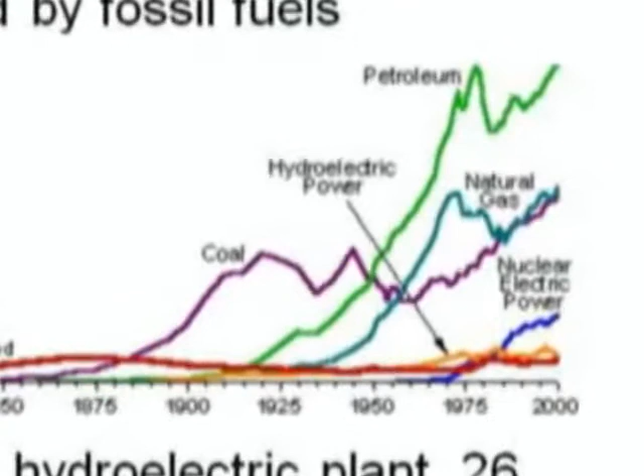This is U.S. energy use from the Energy Information Administration from 1650 forward. And the main point of this is, if you look early on, it's renewables, it's wood, followed by water. And then people began to burn coal, which, living in New England, turned out to be a great environmental boon because it let the forests grow back that had all been cut down for fuel.

So the history of renewable electric generation starts about when the history of electric generation starts, right? Thomas Edison's Pearl Street station in September of 1882 in New York, a coal-fired generating station. 26 days later, the first hydro plant was opened in Wisconsin. So we've done a lot of renewable generation in this country, mostly hydro.

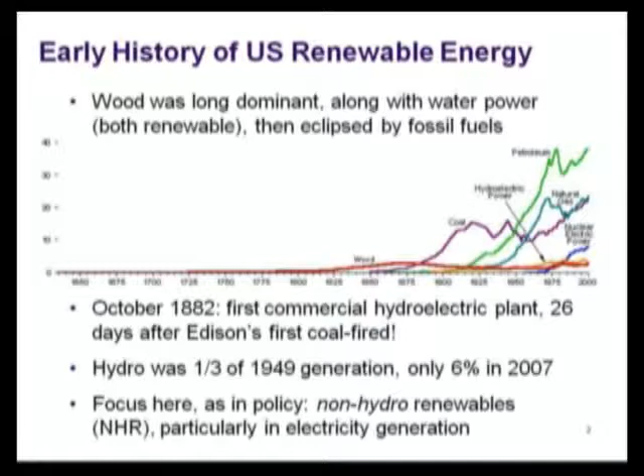In 1949, after a lot of dam building in the 30s, about a third of electric generation in this country was renewables, was hydro. That has declined. Hydro generation has actually increased since 1949, but not nearly as much as electricity consumption has.

And the focus in all policy talks, and the focus in this talk, is on non-hydro renewables. So when I talk about harnessing renewables, I'm really mostly talking about non-hydro renewables and for electricity generation. But I will talk about non-hydro renewables more broadly. This is the share of non-hydro renewables, NHRs, in total U.S. energy from '78 forward. There are a few interesting things to point out.

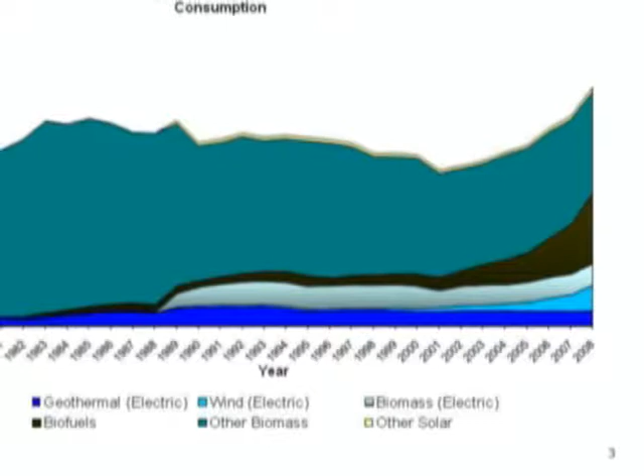From the bottom up, geothermal, pretty steady. Then wind. Notice the sharp ramp up in wind. Then biomass. We tend, when we talk about renewables, to think about wind and solar, but as we will see as the talk goes on, biomass, heavily wood and wood waste, turns out to be very important in the U.S. and elsewhere. And then biofuels, the wonderful ethanol program you begin to see ramp up.

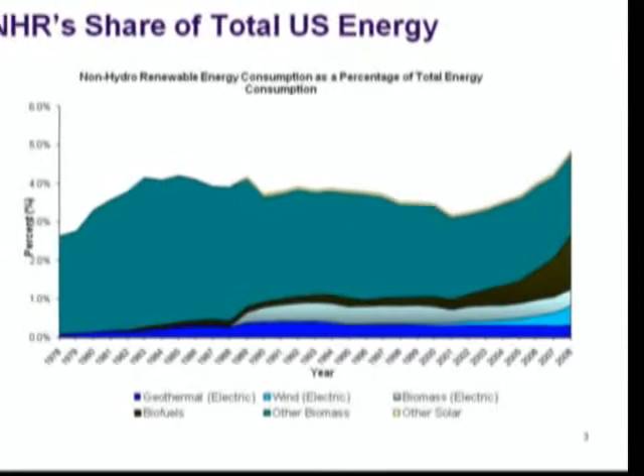I will have nothing kind and indeed nothing to say about ethanol. And then other biomass, which is typically wood for heat. And then this curious yellow at the top, which is other solar. This is not solar for electricity. Some of it is solar for hot water. Most of it is those covers that go over swimming pools to heat them. That counts as solar heat.

We lead the world in solar heat for swimming pools, probably because we lead the world in swimming pools per capita. But Australia's right in there with us. Other uses of solar do not appear in this chart. They're too small. If you focus just on electricity, you see the main sources, the main renewable sources. Again, biomass is not unimportant.

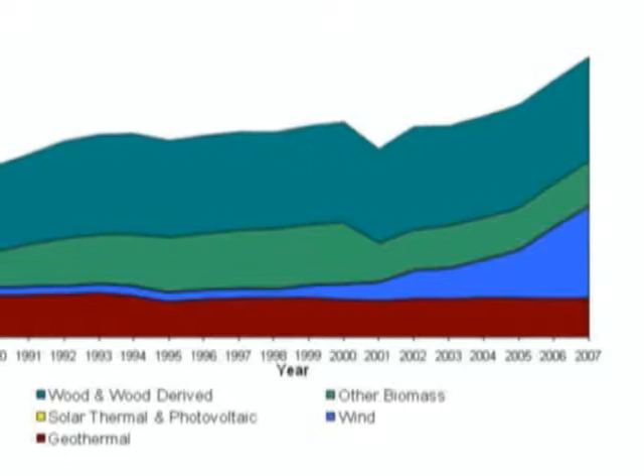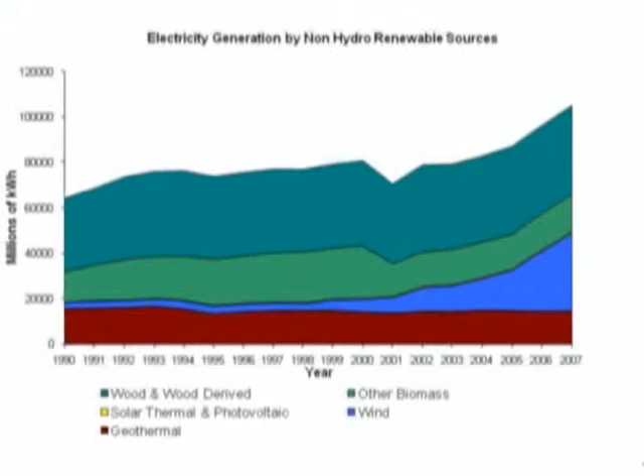I wish I knew exactly what happened in 2001. Somebody may know. I do know the dip in geothermal in the early 90s, which I will come back to. But the two points to be made here. First, look at the ramp up in wind, and this just goes to 2007. And second, look at the importance of wood and wood-derived and other biomass. The importance of biomass in electricity generation, non-hydro renewables, has dwarfed wind until quite recently and is still more important than wind. So that's generation.

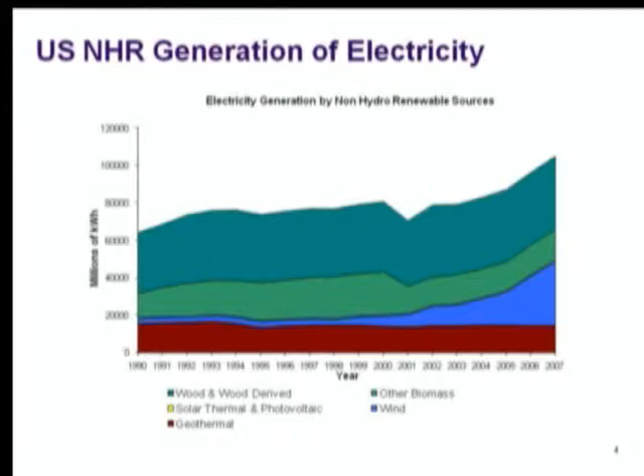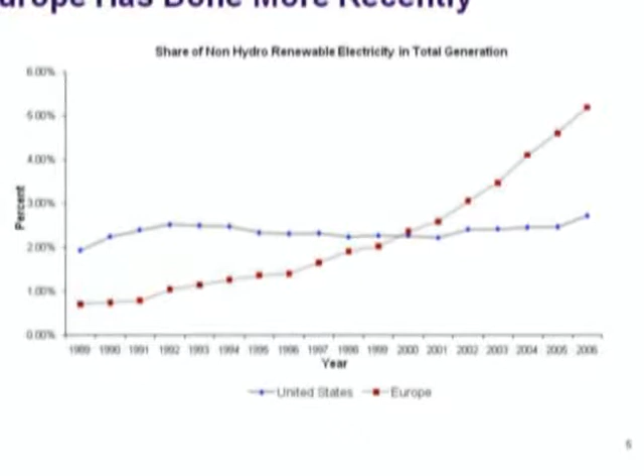On the last data I saw, Michigan is running a little over 2% non-hydro renewables in electricity generation. But the U.S. share, you know, I don't honestly know offhand whether this is the peak or 2006 is the peak, but basically it's flat. Whereas Europe did very, very little and ramped up dramatically in recent years.

The U.S. has a good deal of potential. This is the International Energy Agency. It talks about U.S. potential for non-hydro renewables. They actually did hydro, but I just took it out of the table. Notice the enormous potential for biomass. Wood waste, some of it municipal solid waste. All of these are important sources in various places.

Enormous potential for biomass, also enormous potential for wind. According to the International Energy Agency, the wind potential of the U.S. is greater than almost anywhere else. If you took all of Europe onshore and offshore, it gets to be comparable. Notice also how much smaller the estimated potential is for solar, despite all of the talk about solar. And what a small fraction of the solar potential we've realized, less than 1%. So it's a relatively small potential, relatively small amount realized.

In terms of realizing potential, we do better in biomass and we do better in wind. And geothermal looks to be about tapped out. According to the IEA, we have exploited about half the country's potential for geothermal, but are just getting going in wind and biomass.

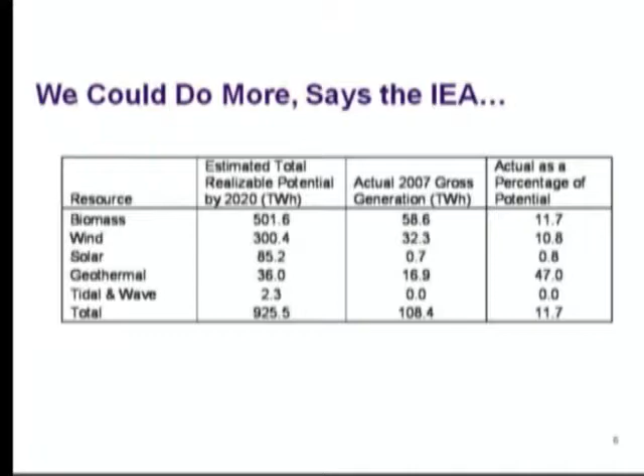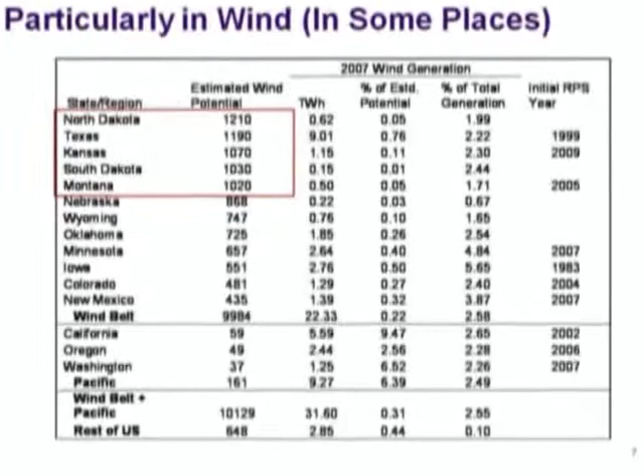This is potential for wind. This is a different source, so the numbers don't quite add. The point of this chart is that there's a lot of wind potential, but the wind potential is heavily localized. Michigan does not make this list. I'm told if you use another source, Michigan would make this list, but this is onshore in particular. Onshore wind potential, an awful lot of it is in North Dakota, Texas, South Dakota, Kansas, and Montana.

Those are notable because, aside from Texas and Kansas City and St. Louis, there are not a lot of people in those places where there is a lot of wind, which gives rise to debates currently in Washington about if we're going to use that wind, how are we going to get it to where the people are, and who's going to pay for getting it to where the people are.

It's interesting that if you look up here, generation as a percentage of estimated potential, these numbers are pretty tiny. If you look down here, the 3 Pacific states, California, Oregon, and Washington, which don't have enormous potential, again, this is the American Wind Energy Association's estimates of potential. Their potential is relatively low, certainly low relative to these, right? This would be potential in terawatt hours a year. I didn't put the units up. But they've done a much better job of utilizing that potential.

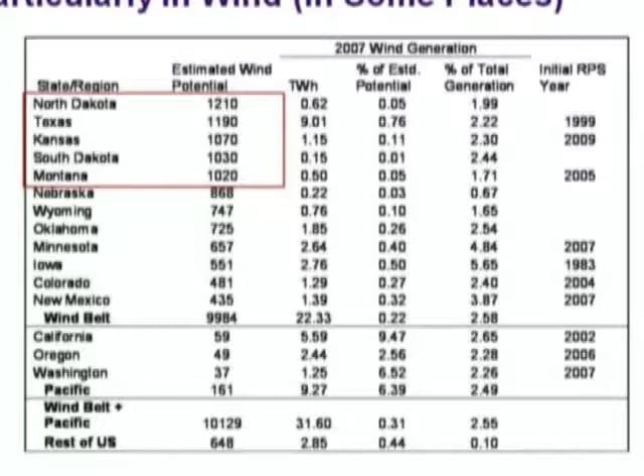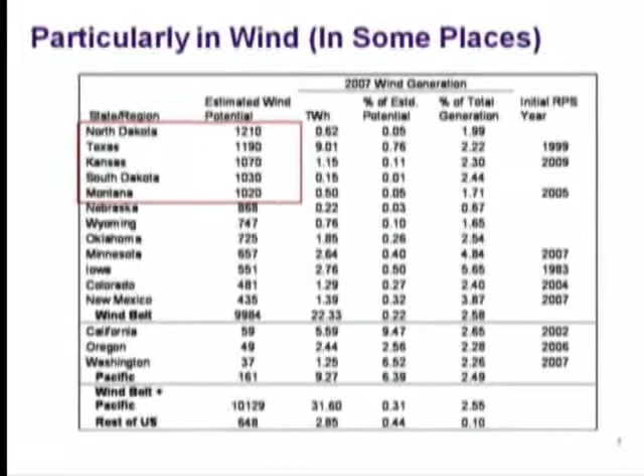California has used almost 10% of its potential, and gets about 2.5% in 2007 of its electricity generated, not necessarily consumed, from wind. So we have a lot of wind potential. It's concentrated. Some states have done a great deal more than the U.S. average of about 2.5%.

Maine. You may not be familiar with Maine. Maine is a few people on the coast and a few ski resorts and some lovely lakes and a whole lot of trees and a whole lot of commercial logging operations, particularly in northern Maine. And it is not too surprising that Maine generates a lot of electricity from wood and wood waste. A lot of it's wood waste, sawmill generation using wood waste for milling operations. But Maine gets well over a quarter of its electricity from non-hydro renewables.

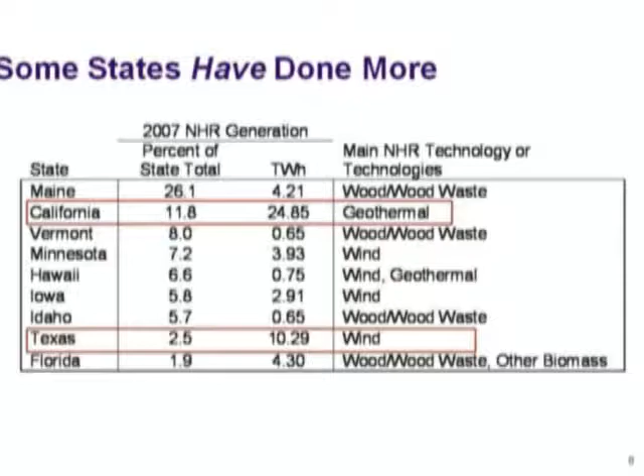California, which stands out in terms of just sheer volume, as well as the percentage, gets a lot of its from geothermal. You can look down this list. Vermont has a lot of trees too. And Hawaii, everything else is expensive. But the other place that stands out, interestingly enough, is a place that most of us don't think of as particularly green or environmentally conscious, particularly if you read the news on the latest Republican gubernatorial primary. Do not think of it as a green state, but it gets a pretty high percentage and a lot of power from wind. I'm going to say a little bit about California and Texas and how they got where they are.

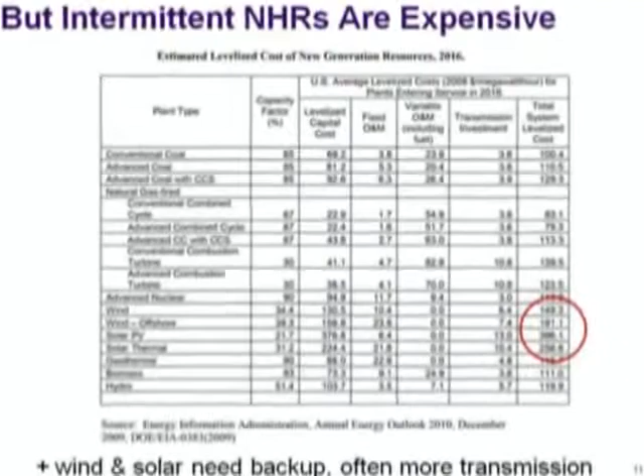So I'm an economist, and when I'm thinking about policy, it's usually not a question of what we can do, but what we should do. And what we should do usually depends to an important extent, not exclusively, but at least to some extent, on the cost. So if you look at those cost numbers on the right side, you will see that they vary a lot. This gas number undoubtedly assumes that you run the gas plant all the time, which you don't. But just take conventional coal plants as a benchmark. That's 100. You get a lot of electricity from coal in this part of the country.

Now look at the numbers for wind, and look at the numbers for solar. So solar looks like 4 times as expensive. Photovoltaics is 4 times as expensive. Solar thermal, which really only makes sense in the desert Southwest, is 2.5 times as expensive. And even wind, that's offshore ocean, not offshore Great Lakes, but even wind is between 1.5 and 2 times as expensive. So if you build a lot of it and you pay for it through electricity rates or subsidies, it's a cost.

And the other thing about the ones I've circled, and you see it a little bit for solar, you don't see it for wind: you see the transmission investment column showing a lot more transmission for solar than for some of these other technologies, but not so much for wind. That assumes wind is located near the electric load. If you build windmills in North Dakota and you put new transmission lines to get it to Detroit or Chicago or Cleveland, those costs go up.

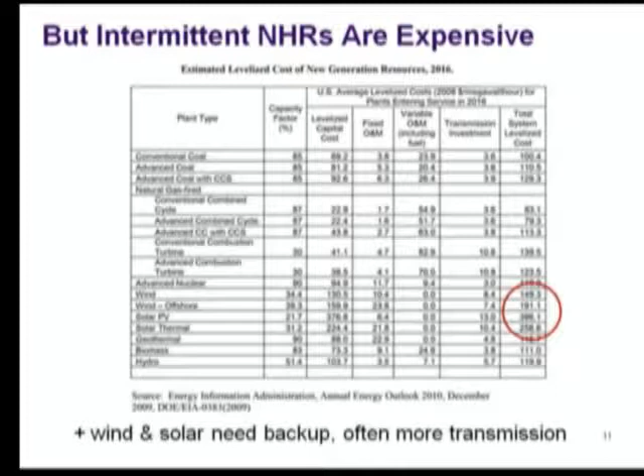And the other thing, which is important to recognize, is they need backup. How does Denmark do 18% of its electricity generation from wind when wind sometimes blows and sometimes doesn't blow? Denmark has good connections to Norway under the ocean, and Norway has surplus hydroelectric capacity. So when the wind doesn't blow in Denmark, hydropower goes to Denmark as backup. And when the wind is blowing in Denmark, they can sell wind power back to Norway. So Norway provides backup.

How does it work in Spain? Well, in Spain, with all that wind, they don't have hydro. Spain is dry, you may recall. Spain has coal, but coal, first of all, is very dirty. Spanish coal is very dirty, and they're trying to phase it out. And second, you don't ramp coal plants up and down. So what do you do? You build more gas plants.

But of course, the wind blows most of the time. It's just sometimes it doesn't blow in the locations where they put windmills. So those gas plants don't get to run very often. So you build gas plants and you run them only occasionally. This is not a cheap proposition.

Now, how much do you need? Do you need one megawatt of gas capacity for every megawatt of wind? No, because their wind is spread around and it never all stops, so things aren't terrible. But it is an extra cost. It's not a cost you have for municipal solid waste. It's not a cost you have for biomass. It is a cost for wind, and it is also a cost for solar. Solar is a little tricky.

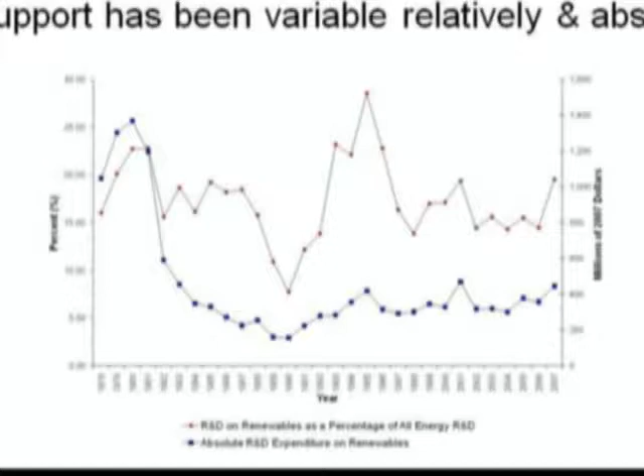Can you see this? The blue is dollars. There was a lot of excitement around 1980 when we had the oil shock and we were going to spend money on renewables and it was going to be great, and then the oil prices fell. Here's support for renewables, and here's support for renewables as a percentage of energy research. So in both absolute and relative terms, we have not done a great job at the federal level of support for renewables.

What about deployment? Well, again, the economist says, okay, deployment is a good thing. Let's talk about why. Why do we want more renewables deployed? In Europe, they talk a lot about energy security, and you even hear it here. But energy security in this country is an oil problem. In Europe, it's also a gas problem because they get Russian gas. And we don't generate electricity with oil. So if you're substituting American wind for American coal, you're not doing much for energy security.

What about jobs? Well, this is very popular, and I'm sorry, but this argument simply doesn't fly. There's the question of what those people would be doing otherwise, and if you say they'd be unemployed otherwise, then you have to ask, why not fix bridges? Why not repair roads? Why not build schools? There are lots of other things you can do to create jobs. Why is this a particularly good job creation thing? In Massachusetts, the governor desperately wants to build windmills offshore. Windmills offshore are really expensive, in deep water in particular.

But he says it'll be Massachusetts jobs. And you say, wait a minute, where are the windmills going to be made? You bend metal in Michigan. We do not bend metal in Massachusetts. We talk about bending metal. We do the theory of bending metal. We do not bend metal. So they will not be made in Massachusetts.

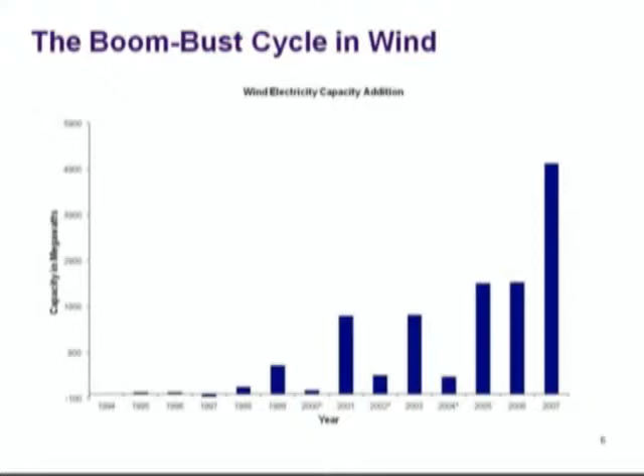And you can relate the good years and the bad years to, was the subsidy solidly in place or not? Were people waiting to see if Congress would pass it? Was it in fact off? I'm not going to walk through it. I don't know it off the top of my head, but it's not like the industry is being dumb here or people are placing bad orders.

It makes a whole lot more sense to build it if you get a 30% subsidy than if you don't. So if you can wait, you wait. That's not how you build an industry. That's not how you get the ball rolling if you really want to get the ball rolling in any kind of cost-efficient manner. So what about the states? What have the states done?

Well, every state, there is a database, the DSIRE database, online, maybe .gov, .something, but if you just Google DSIRE, you will get more data than you ever wanted on state and federal programs to support renewables. Every state except Arkansas does something. Some kind of tax break, or a credit, or a property tax, or a special assessment, or something.

They're all different. Every state does something different, and every state but Arkansas has a list of things they do. Sometimes it's only locally, sometimes it's statewide, but every state at the state level but Arkansas does something. I think in Arkansas, some towns do things. So it's very common; they all have regulations requiring grid connection, requiring various other things. They all differ too.